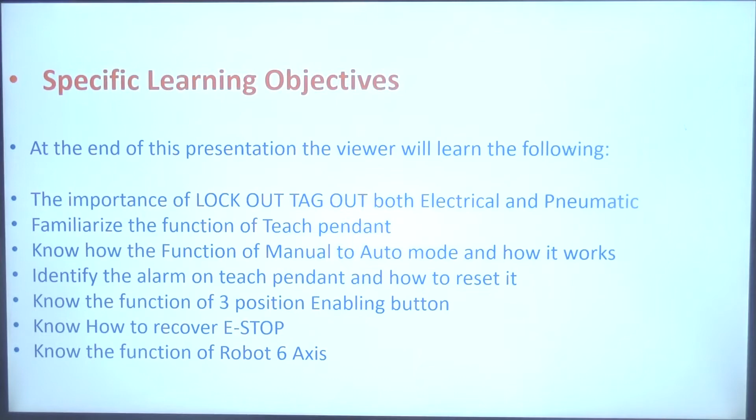Lockout tagout. Before doing any repair or major maintenance, don't forget to put lockout tagout on both the controller and the pneumatic valve supplying the robot, and specify your name and position.

This is the disconnect of the main controller.

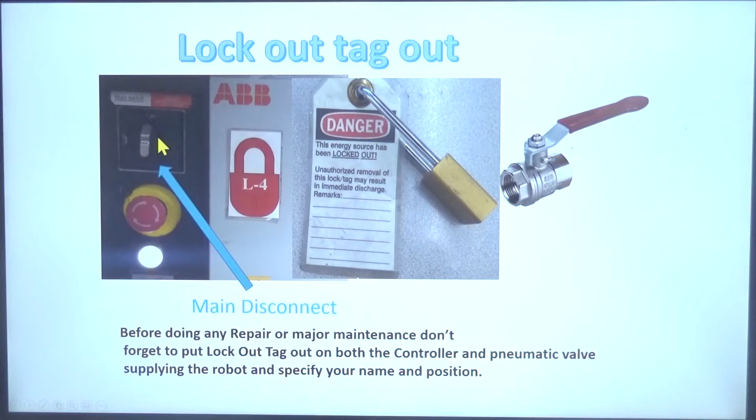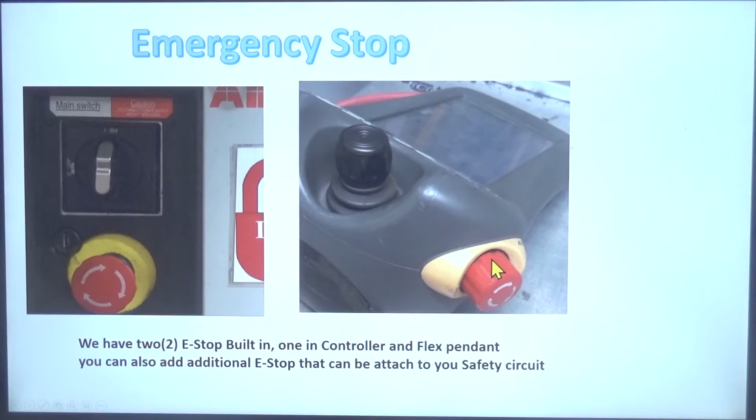Emergency stop. We have 2 e-stops built in, one in the controller and one in the flex pendant. You can also add an additional e-stop that can be attached to your safety circuit. This is the e-stop for your controller, and this is the e-stop for the flex pendant.

Familiarize the functions of flex pendant. Here is the flex pendant. We're gonna do this first.

Robot fault alarm. This is the indication that we have a fault. To acknowledge this, just press this acknowledge button.

This is the main menu. The main menu gives access to Hello World, HotEdit, Inputs and Outputs, Jogging, Production Window, Program Editor, Program Data, Backup and Restore, Calibration, Control Panel, Event Log, Flex Pendant Explorer, System Information, Log Off and Restart.

We're going to discuss this in detail on the next video.

The next one is the taskbar, a maximum of 6 programs can be open. This is the production window, jogging window, and this is one of the programs of the robot. You can have 3 more. After that, you need to close this in order to open more.

The quick set menu. This is the quick set menu. If you click this one, this is what you are going to see: the quick set menu gives access to...

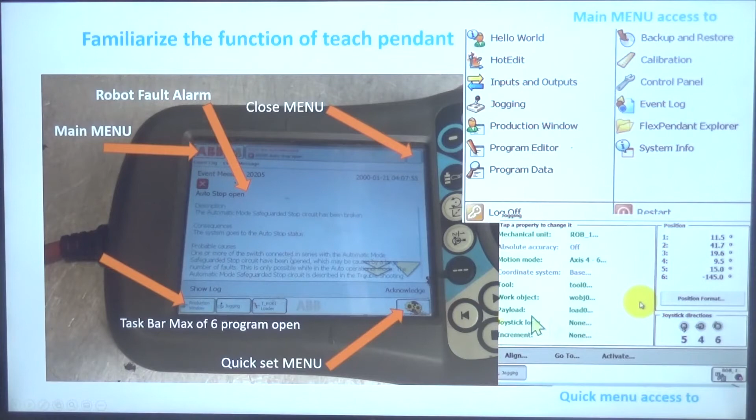Continuing with the familiarization: Motor running on, and running at 100%. This is the indication that our motor is running and the running speed is 100%, meaning we are in auto mode. At the bottom, we have play, step, and stop buttons.

After you put the robot from manual to auto, you need to press play for the robot to run. If you want to stop the robot, you can stop it whether it is in auto or in manual mode. The step button steps forward to the next routine, and step backward goes to the previous routine. You can only do this using manual mode.

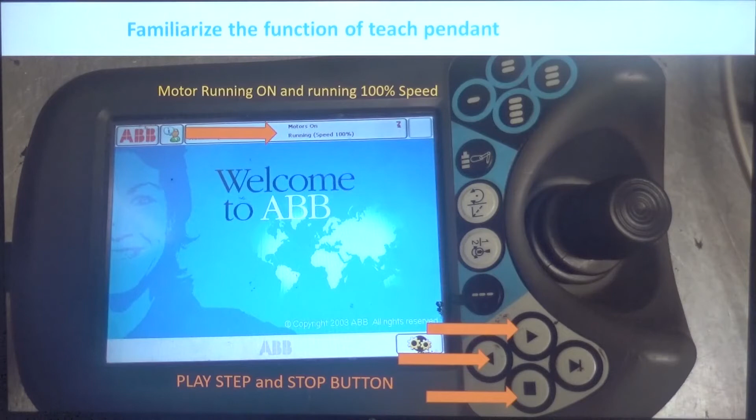Continuing with the familiarization function of the teach pendant. Here we have the mechanical unit. This is the robot, or the external axis.

This one is for linear or reorient, and this one is for the axis, axis 1 to 3 and axis 4 to 6. If you click this one, you now have the choice of axis 1.

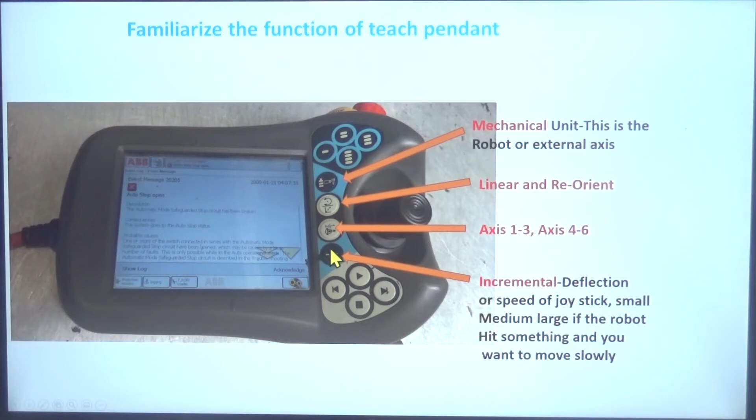If you click again, it will go to axis 4 to 6. This one is for the incremental, so deflections or speed of the joystick: small, medium, or large. If the robot hits something and you want to move slowly, you click this increment and put it to small, medium, or large.

Operating mode. When you select the key switch to manual mode, you will be able to move the robot by jogging it or stepping it through the routine or program.